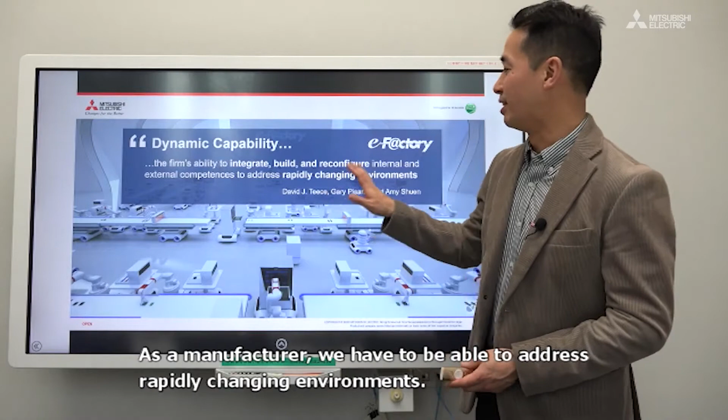In that context, this word dynamic capability is becoming very popular. What is dynamic capability? Dynamic capability is the firm's ability to integrate, build, and reconfigure internal and external competences to address rapidly changing environments. And that's what we're facing right now. As a manufacturer, we have to be able to address rapidly changing environments. And that's why a lot of people are looking at flexible manufacturing to adjust to these situations.

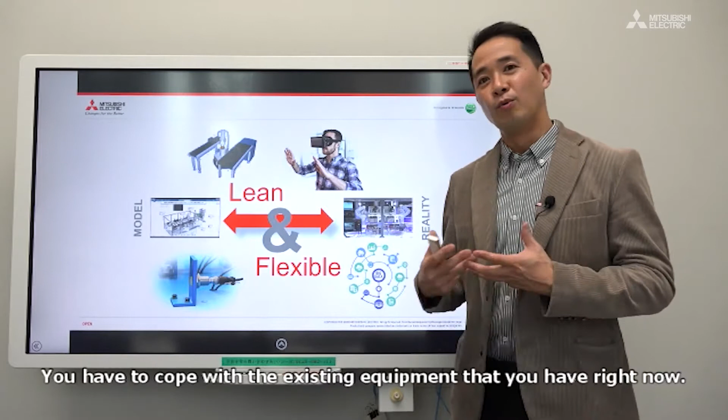At the end, what we always tell our factory staff is the most important thing is to be lean and flexible. You don't have time to really ramp up production with new factory lines. You have to cope with the existing facilities you have right now. And in order to do that, your factory, at its core, has to be lean and flexible. And I think this is very important.

So let's talk a little more about manufacturing in the new normal. And maybe I can share some experiences that we had in our own factories to cope with the COVID-19 virus.

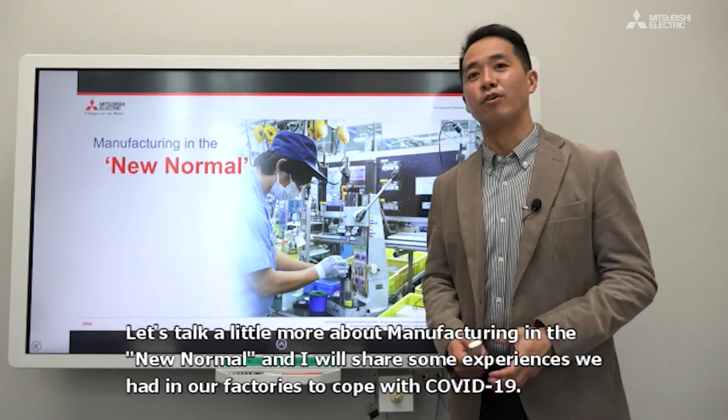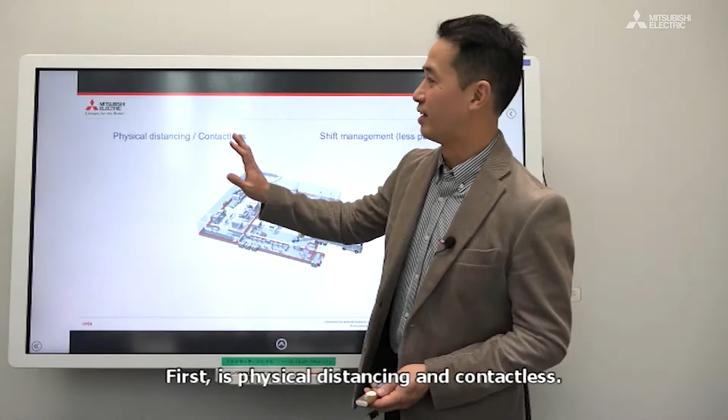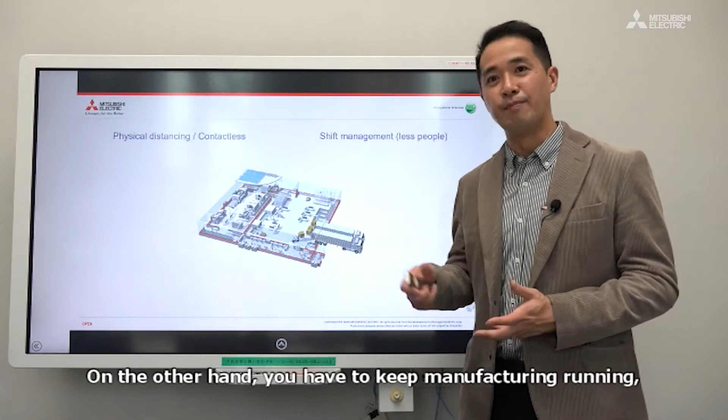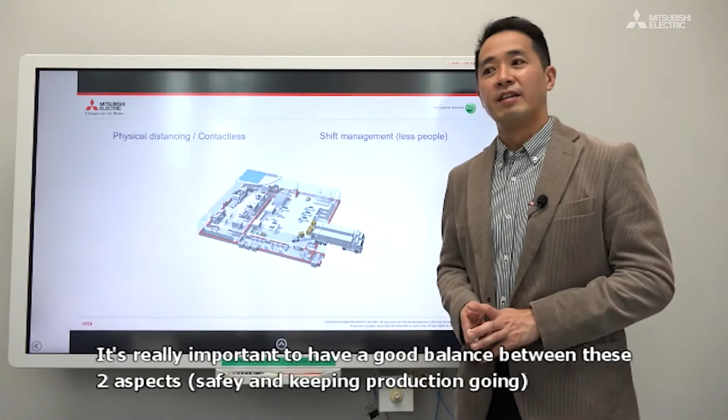I think there are two major things you have to be aware of in the new normal. First is physical distancing and contactless, and the second is shift management. Today, I'd like to mainly speak about shift management. The biggest risk you have in the factory is someone gets infected by the virus and you have to isolate everybody or other people. You have to assure the physical safety of your people in the factory, so it usually results in a shutdown. But on the other hand, you have to keep manufacturing running. You have your duty as a supplier to the market to provide parts. And it's really important to have a good balance between these two aspects.

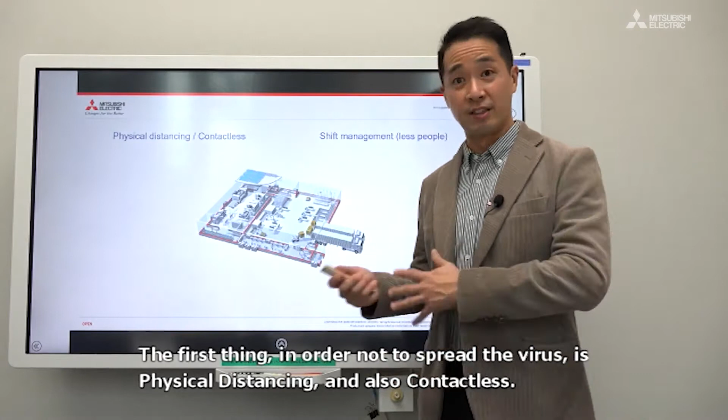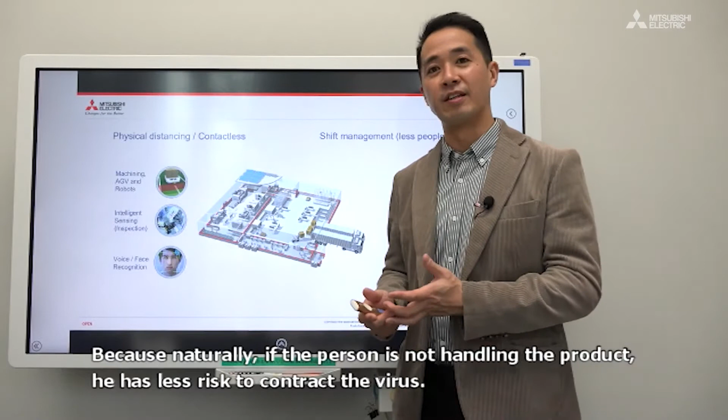So the first thing, in order not to spread the virus, is physical distancing and also being contactless. We're talking about things like machining, automation, using AGVs and robots, because naturally, if the person is not handling the product, he has less risk of being infected.

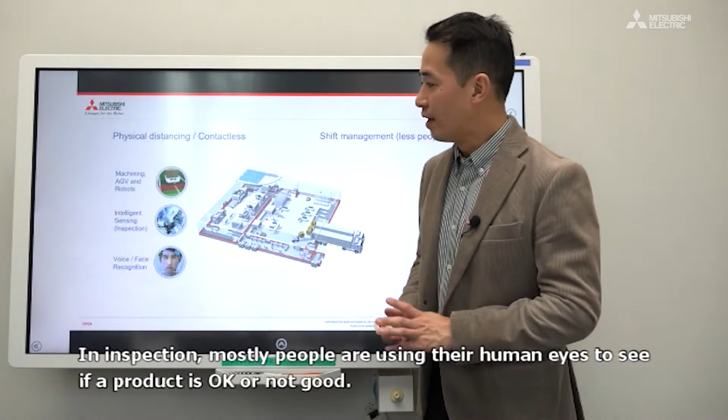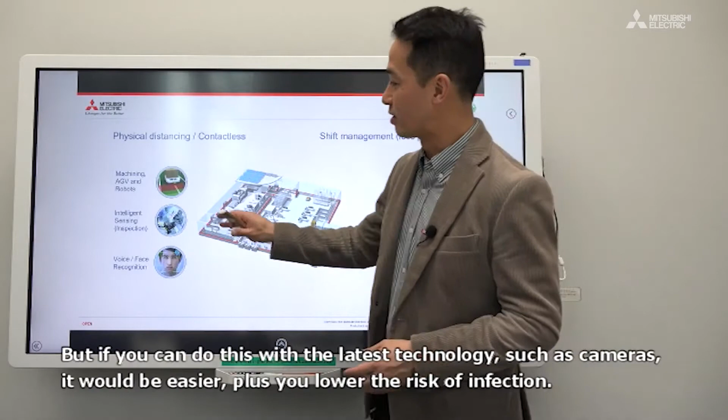On the other hand, there's other things like intelligent sensing that a lot of people are looking at. Right now, a lot of people, with their human eyes, are looking to see if products are good or not. But if you can do this with the cool technology out there with cameras, it would be a big plus. Plus, you lower the risk of infection.

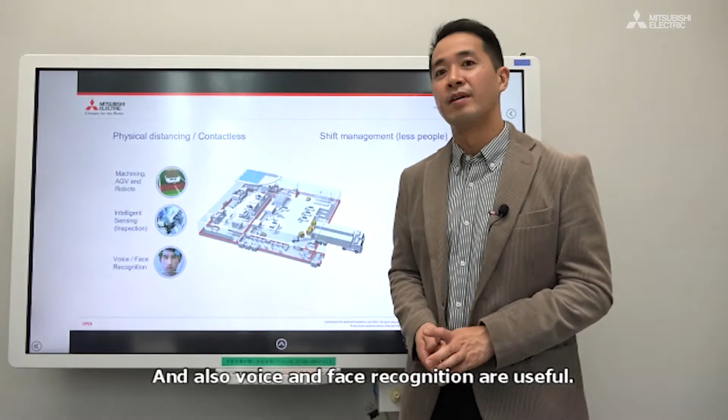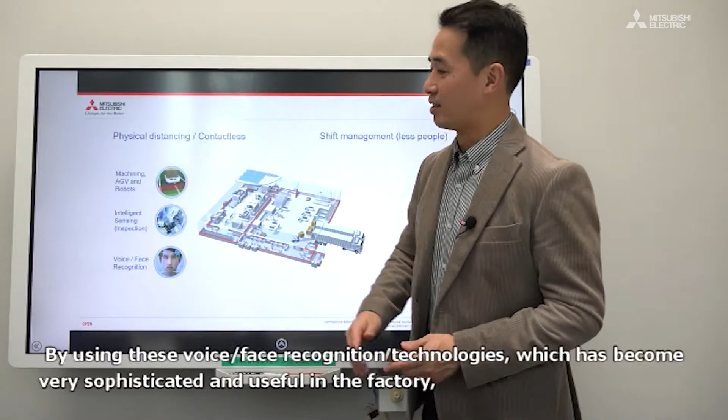Other things are voice and face recognition. There's a lot of buttons on the factory floor. When you move a machine, when you want to press an e-stop, you need to press a button. But that's also a risk for infection. By using these voice and face recognition technologies, which have become really sophisticated and usable in the factory, I think these are going to help you maintain your physical distance.

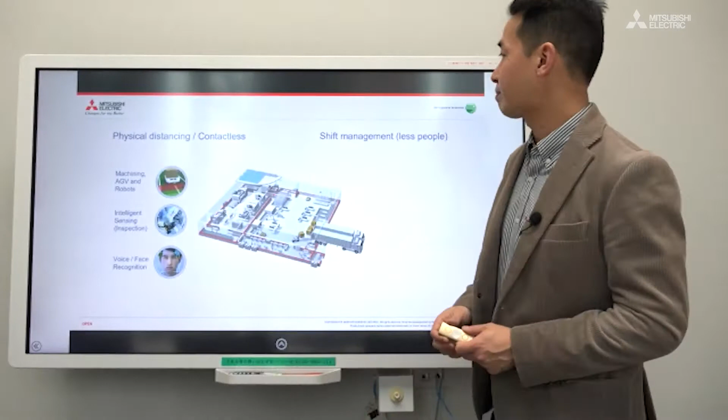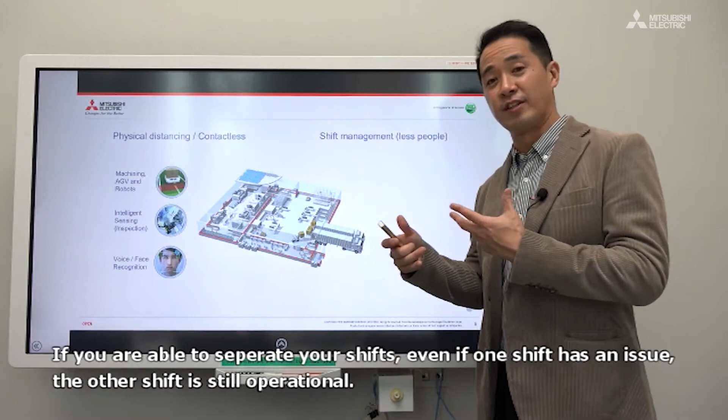The other part is shift management. I'm going to talk about this in the next slide, but basically, if you are able to separate your shifts, then even if one shift has an issue, the other shift is still operational, meaning that you will be able to continue production.

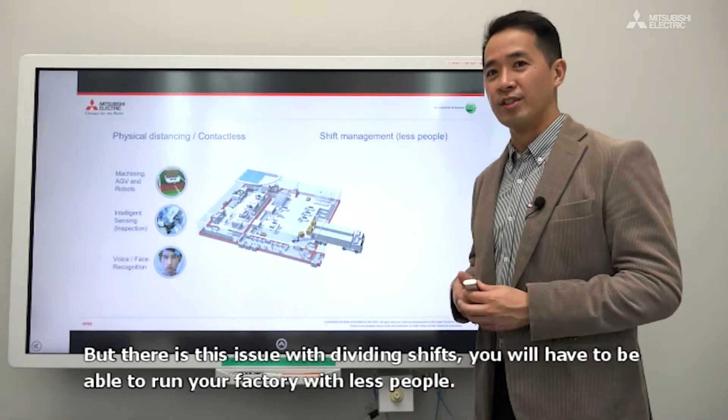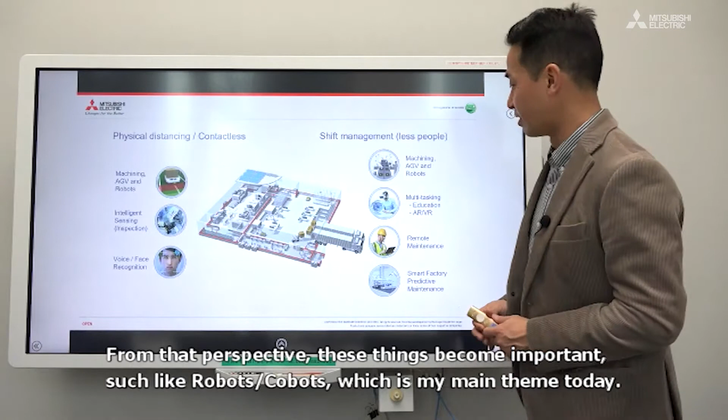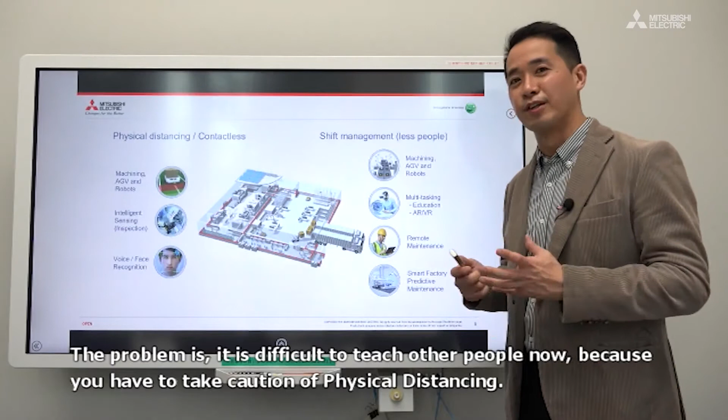But there is this issue with shift management, meaning you have to be able to run your factory with less people. In that perspective, using robots, which is my main theme today, and other factors become very important, such as multitasking in education. Because you're running the factory with less people, you need to educate people to do other tasks.

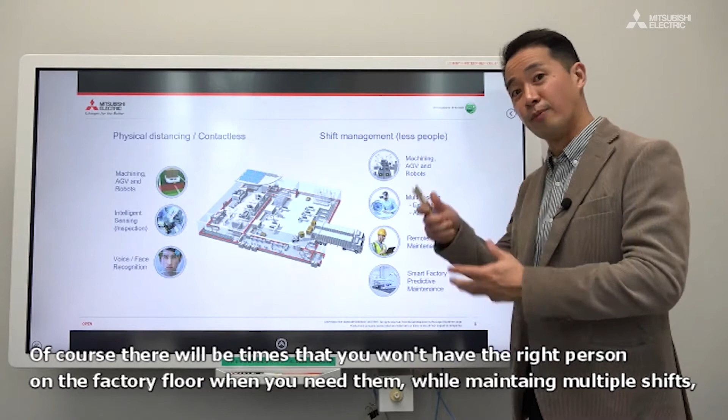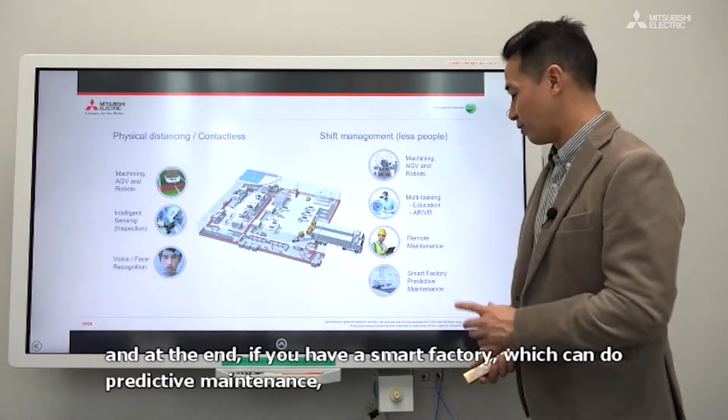The problem is it's really difficult to teach people because you have to be aware of physical distancing. That's why technologies like AR and VR or online learning will be very important. Of course, there will be times you won't have the right person on the factory floor when you need them if you're maintaining shifts. In those cases, remote maintenance capabilities are also becoming very important. And at the end, if you have a smart factory which can do predictive maintenance and tell you problems before they happen, that's the best. That's something we definitely should aim for in the future.

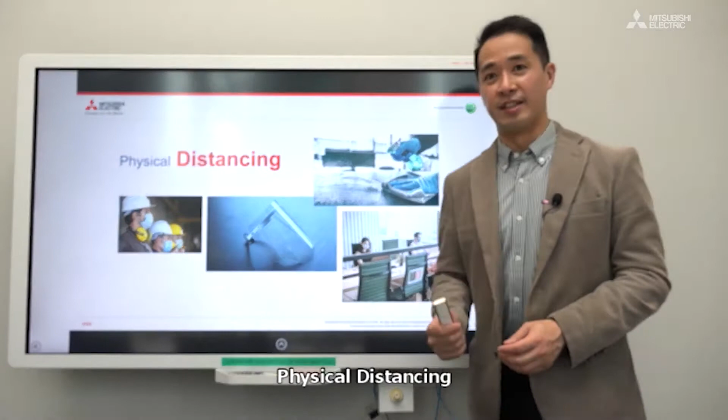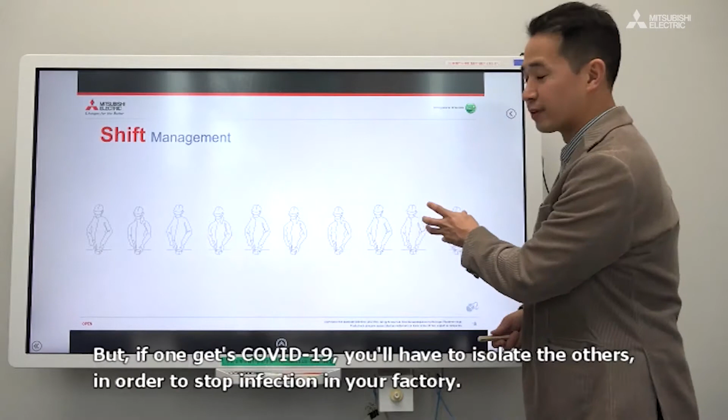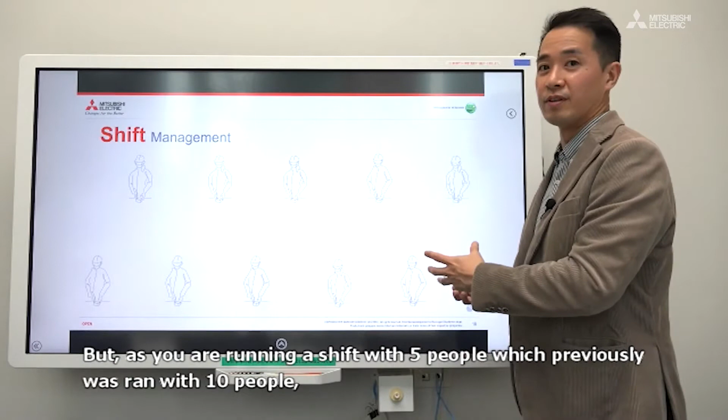Physical distancing. As I said, this actually happened in our factory floor: you have a factory running with 10 people, but if one person gets the virus, you have to isolate the others to not spread the virus in your factory. So what you do is create 2 shifts. But because you're running a shift that previously had 10 people with only 5, that means you have to do something in between—they can't handle the work of 2 people. And that's why robots are becoming very closely looked at in the new normal.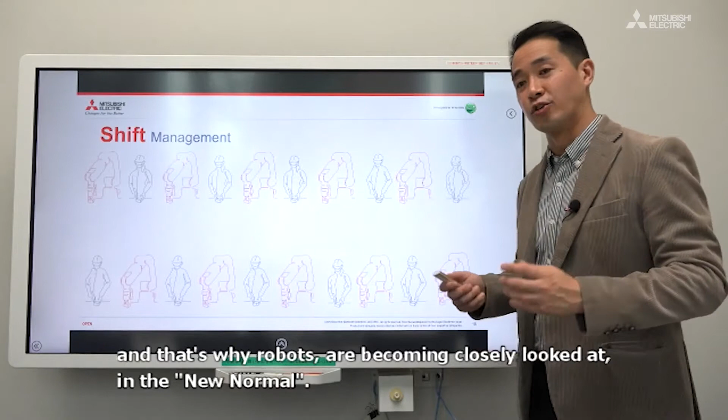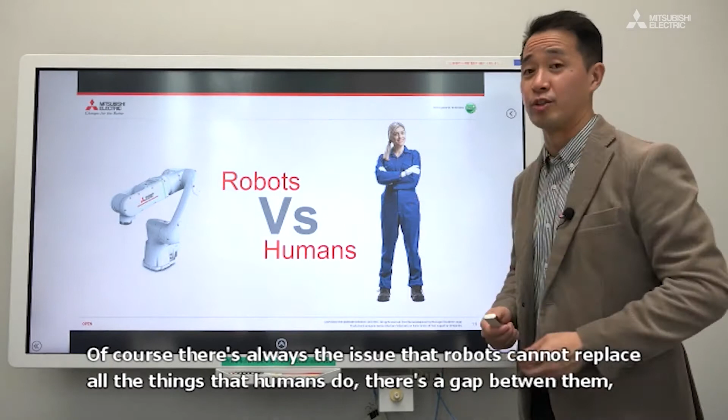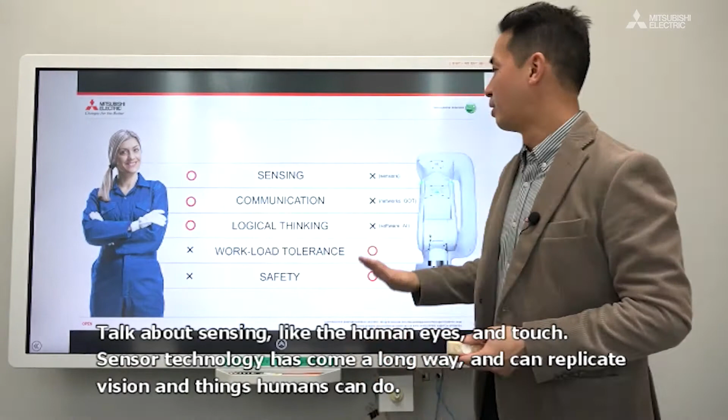Of course, there's always the issue that robots cannot replace all the things humans do, so there's always a gap between them. But with new technologies, we see this gap becoming much smaller. I mean, you talk about sensing, like eyes and touch, but sensor technology has come a far way, and it can replicate a lot of movements and vision that a human has.

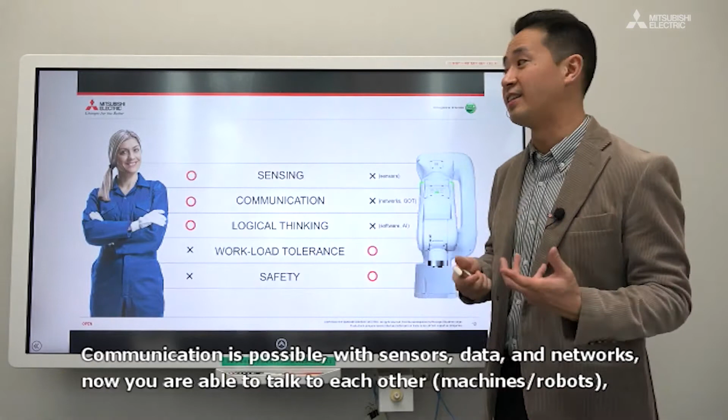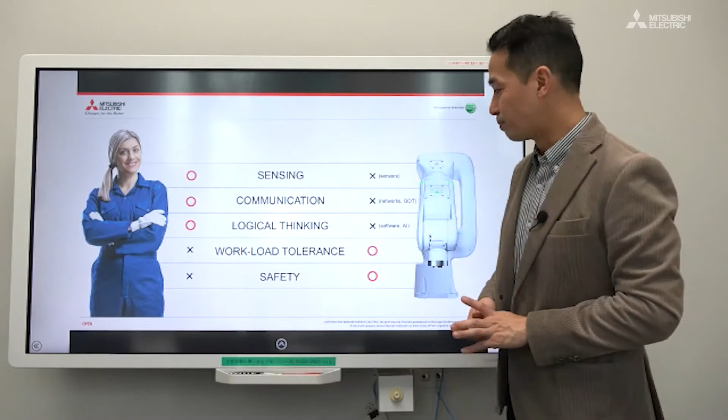Communication with sensors and networks and data—you're able to communicate with each other better in the future. And logical thinking, I'm sure with developments in software and AI, it's going to do a very good job. There's also some benefits a robot has that a human doesn't, such as workload tolerance. They can do the same repetitive movement over and over for 24 hours without getting tired.

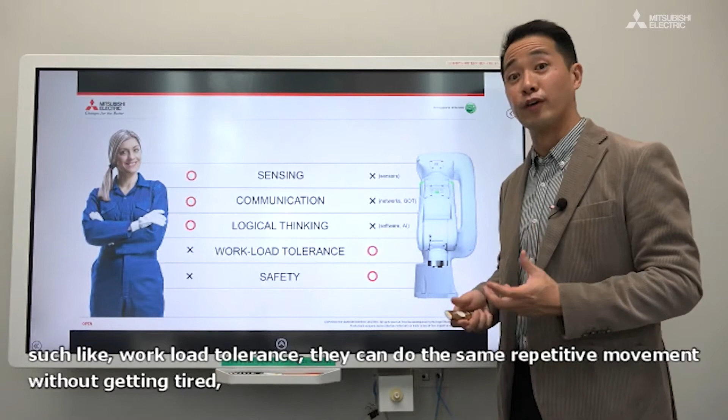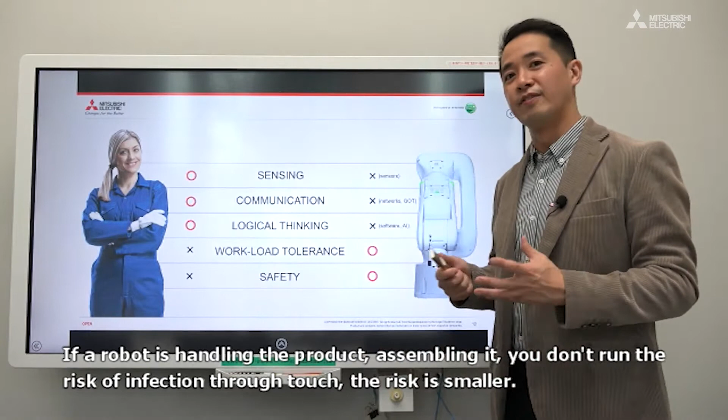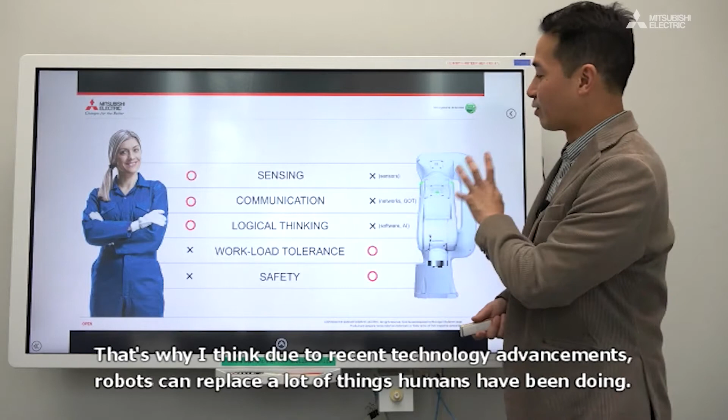And the other thing, which is most important in the new normal, is it's safe. If a robot is handling the product, assembling it, then the risk of being infected with the virus through touch is very, very small. So that's why I think, due to recent technology advancements, a robot can replace a lot of things that humans can do.

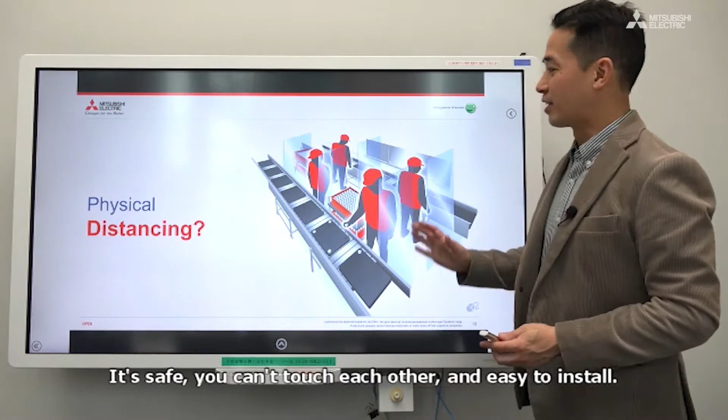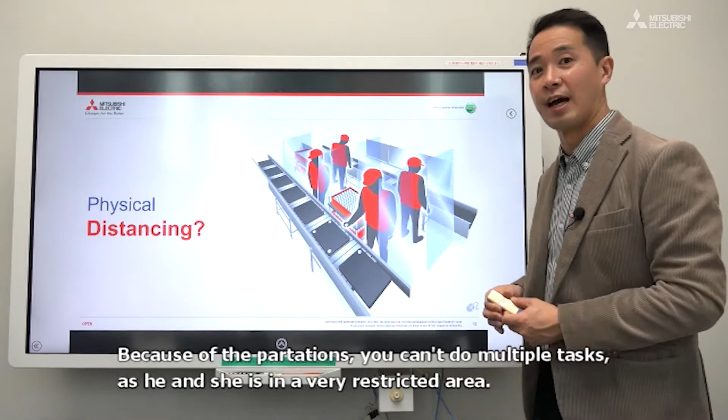Okay, let's talk about physical distancing in the factory. The first step everybody thinks of, and the easiest, is to put partition screens in between. Okay, it's safe, you can't touch each other, easy to install, but there's a big issue with this, as it restricts the movement of the human being. Because of this, he can't do multiple tasks at one time, and he's in a very small area to work with. So it's not really good from a productivity point of view.

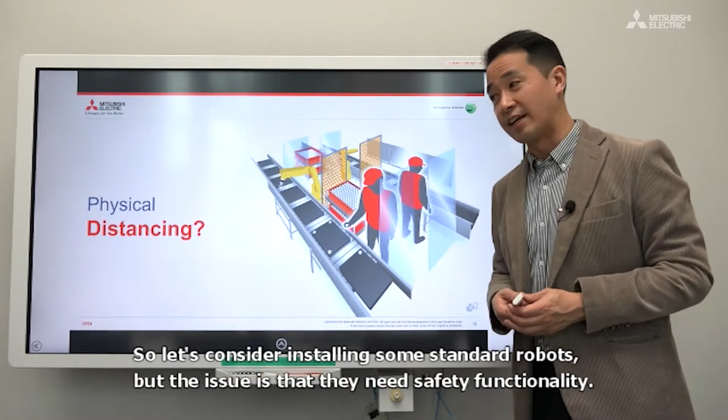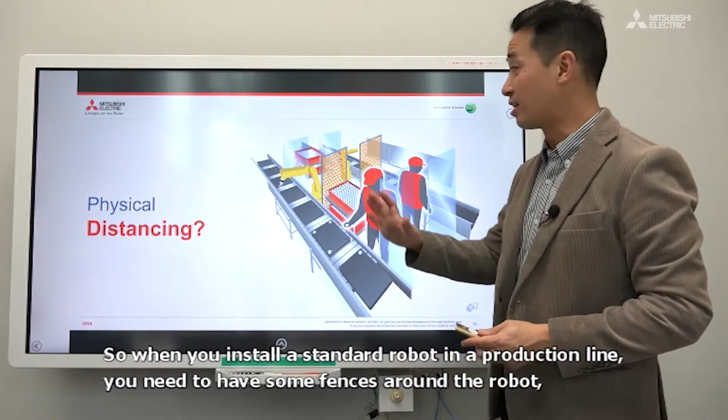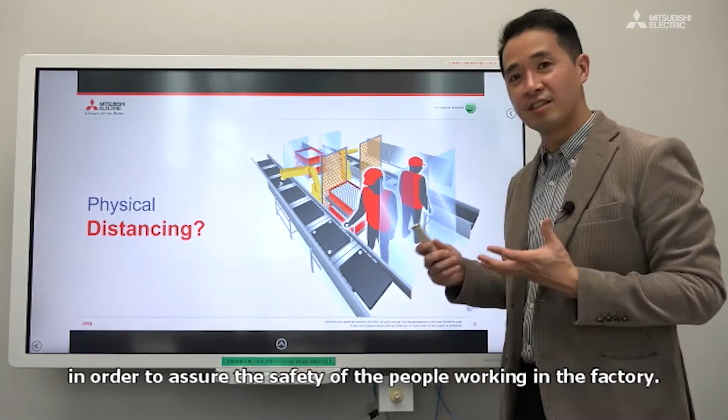Okay, then let's install some standard robots. But the issue with standard robots is they need safety functionality. So usually if you try to install a standard robot in a production line, you still need gates or fences around the robot to ensure safety for the people working in the factory. So this still restricts the movement and multitasking that this person needs to do in the factory.

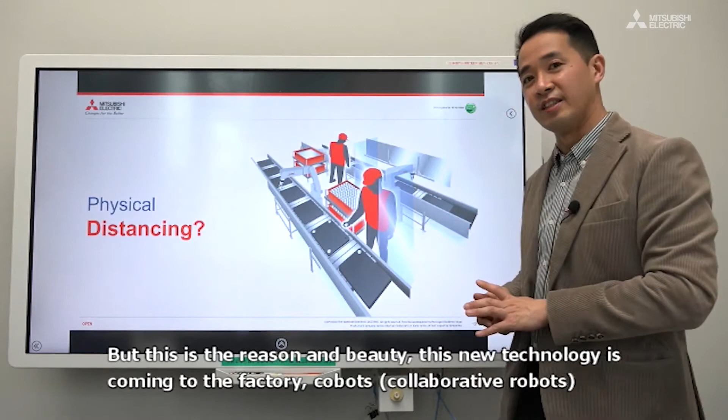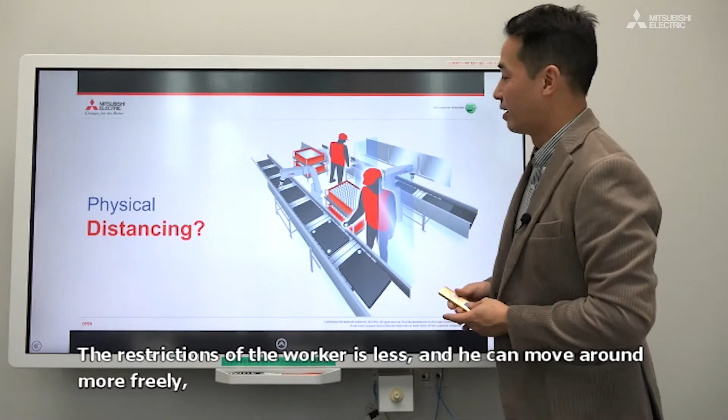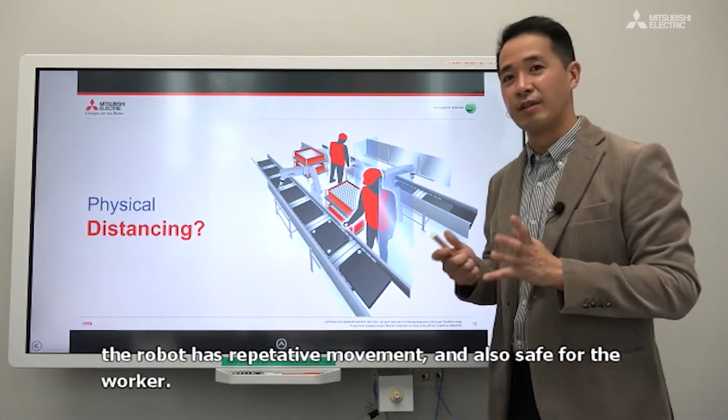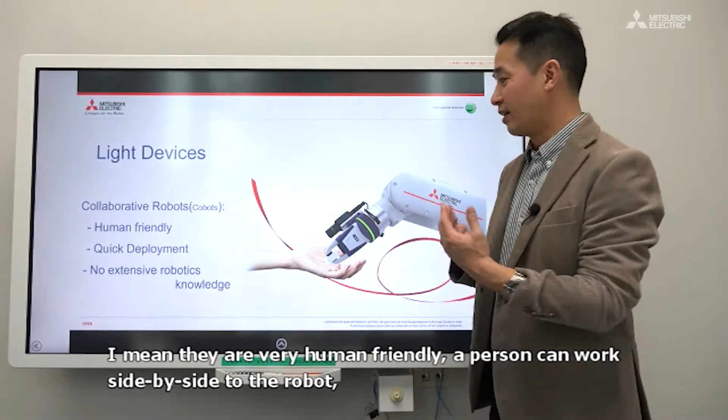One characteristic of a cobot that's really great is they are what you call light devices. What do I mean by light devices? I mean they're not only human-friendly, a human being can work side by side next to them, but it's also very quick and easy to deploy.

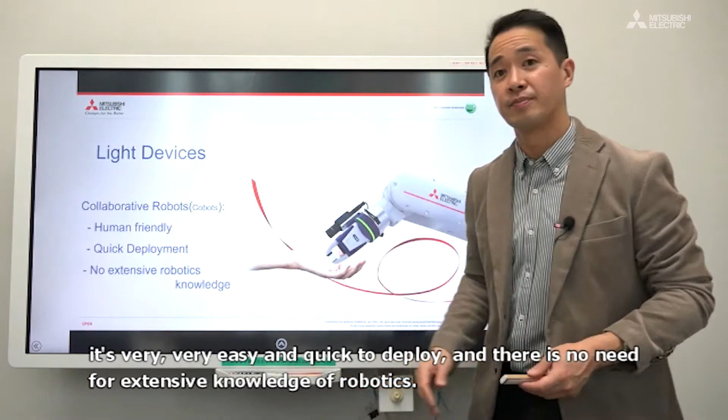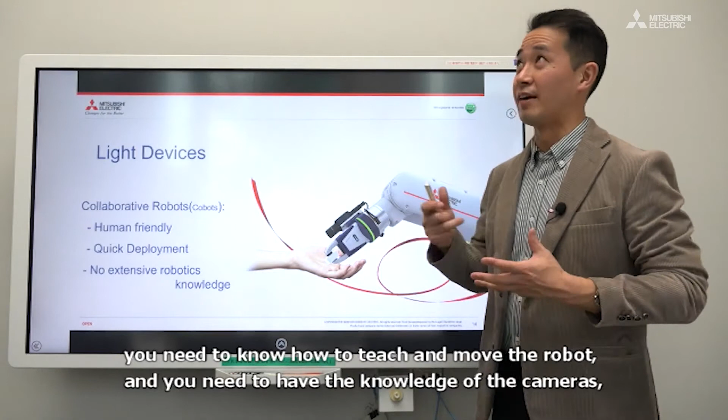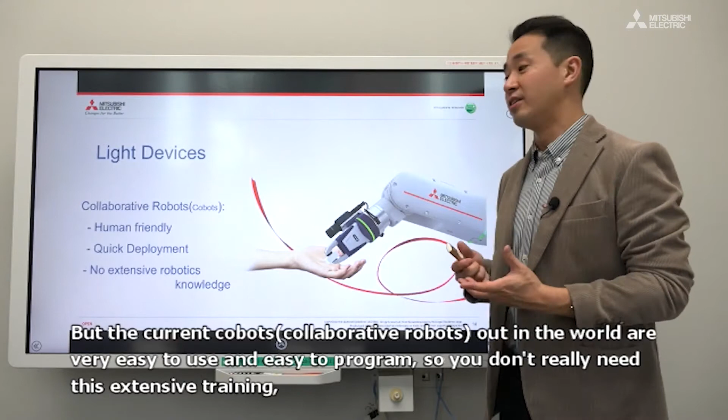Everybody thinks, hey, just install a robot. But in reality, it's not so easy. You need to know how to teach the robot, and you need to have knowledge of the camera. So a certain amount of robot technology is necessary. But these cobots that are out in the world are very easy to use and easy to program, so you don't really need this extensive training.

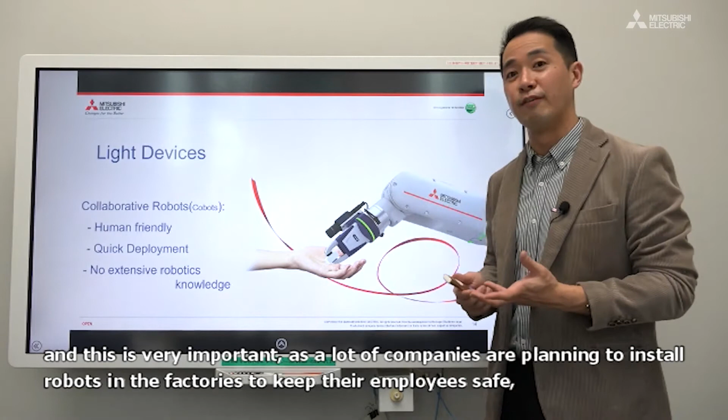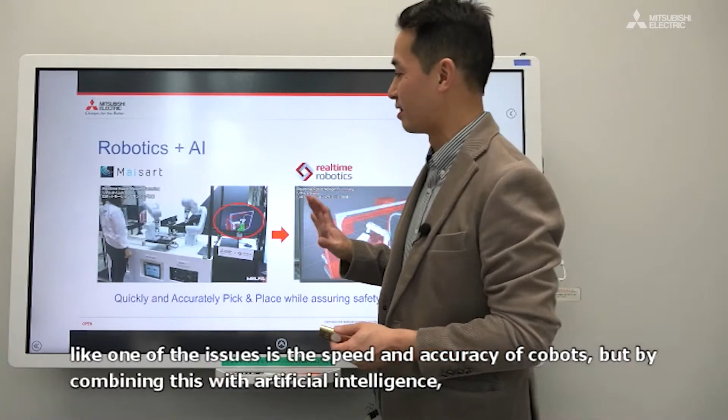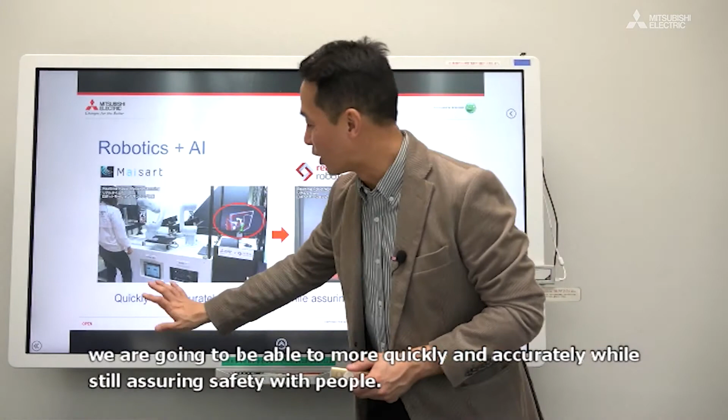This is very important because a lot of companies are planning to install these robots to keep their employees safe, but of course you don't have a lot of time. I'm sure the technology surrounding cobots will only develop even better. One of the issues is the speed and accuracy of the cobots, but by combining this with artificial intelligence - and that's exactly what we're trying to do now - we're going to be able to more quickly and more accurately pick and place while still assuring safety with human beings.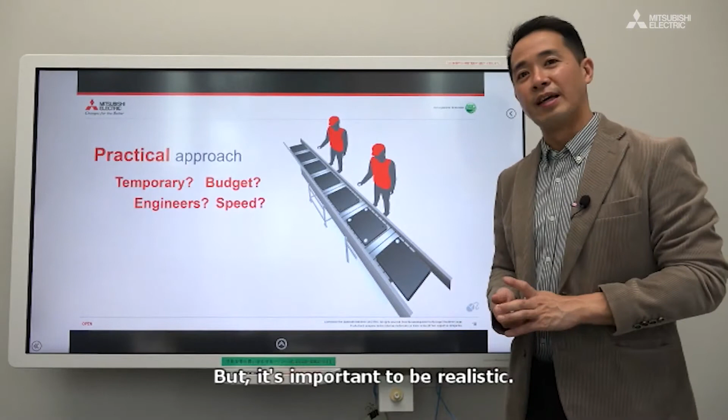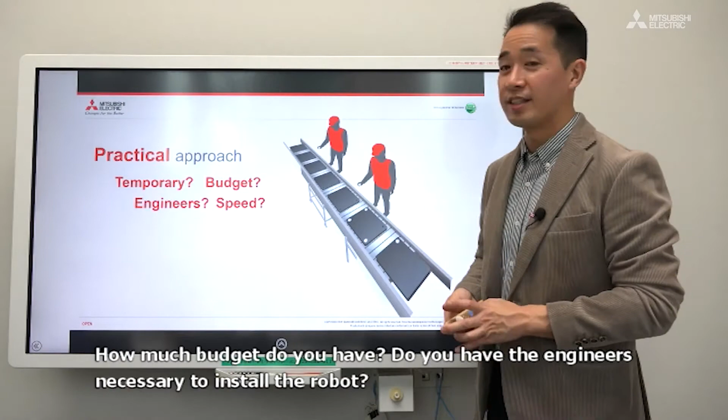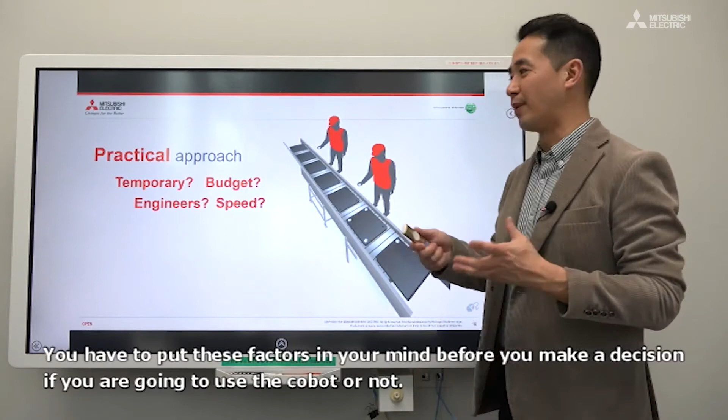But I also want everybody to be realistic. Please always take a practical approach. Is the solution you need temporary? Are you only going to do this for 1 month? Or maybe it's going to be permanent for 3 years after this? How much is your budget? Do you have the engineers to engineer the robot or the cobot? And how quick do you need this installation? You have to put these factors in your mind before you decide if you're going to use a cobot or not, because sometimes the answer is a quick partition screen.

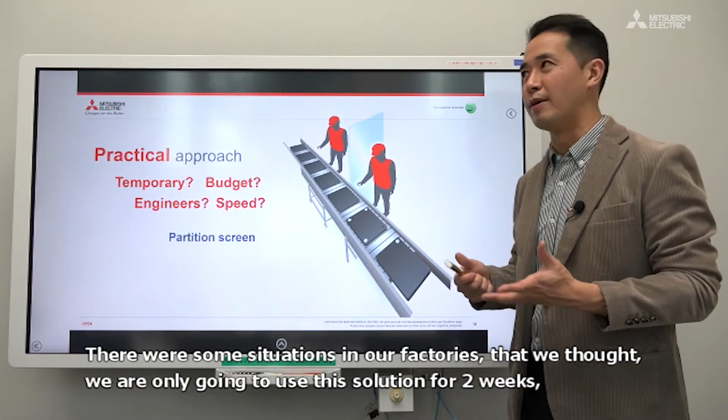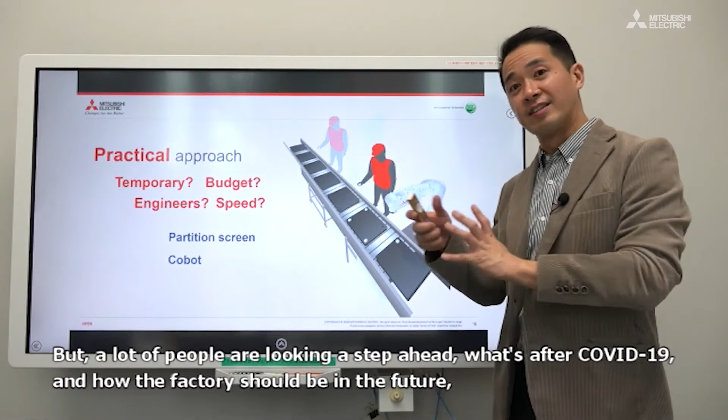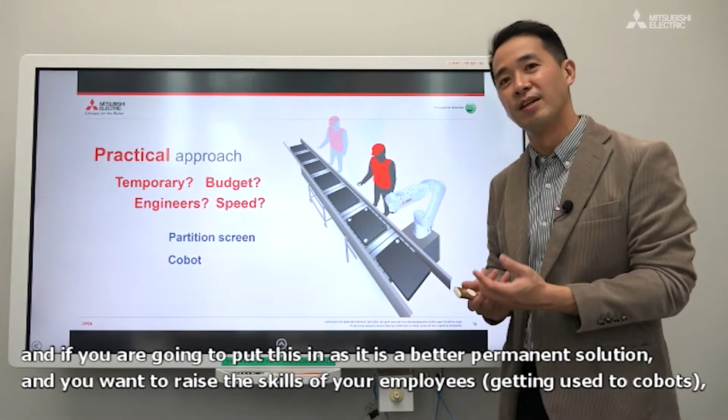There's a lot of issues in our factories that we figured out - okay, we're only going to use this for maybe 2 weeks, so let's just cope with the partition screen, and think about cobots and robots for the future. But a lot of people are looking a step ahead, what's after COVID, and how the factory will develop. If you're going to put this as a permanent solution, or you want to raise the engineering skill of your factory employees, maybe installing a cobot right ahead is your right choice. But I think it's important to be very practical because at the end, it's safety and it's also ROI, return on investment.

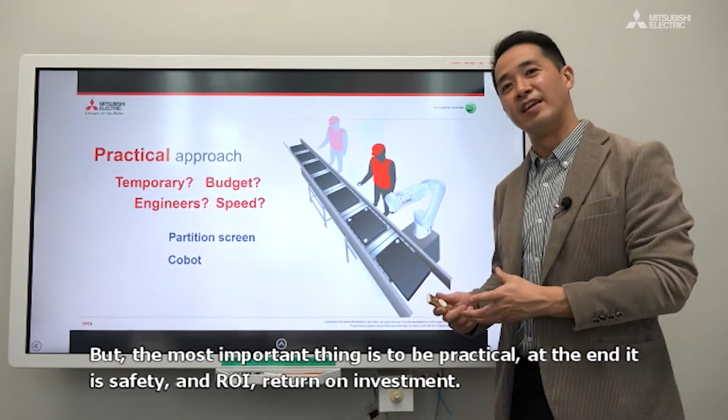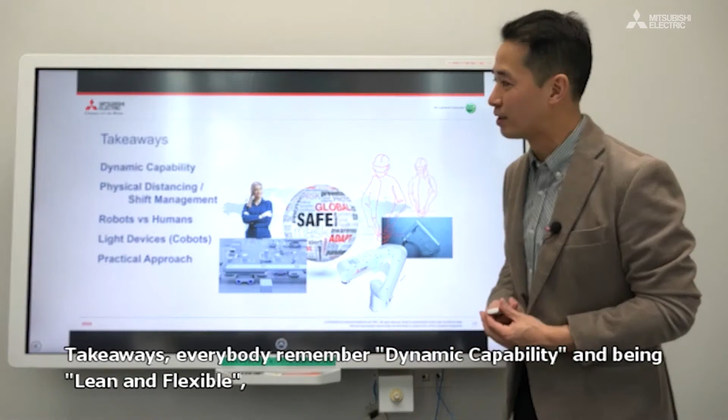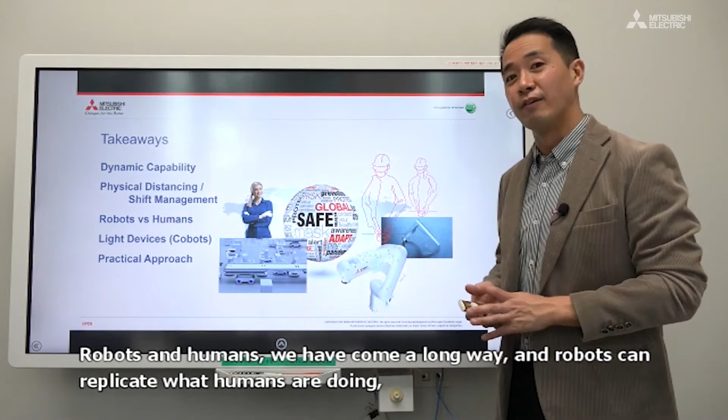Okay, takeaways. I think everybody please remember dynamic capability and keeping lean and flexible. These are the keywords: physical distancing, shift management, and of course employee safety is priority. Robots and humans - we've come a far way of being able to replicate what humans are doing. Please consider cobots because they're very light devices and easy installs to the factory. And at the end, let's be practical.

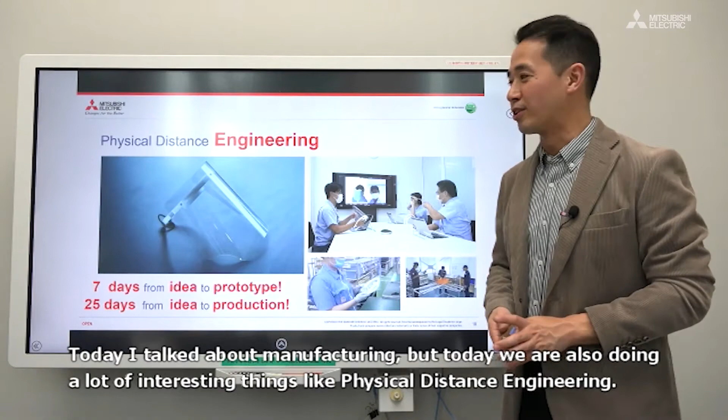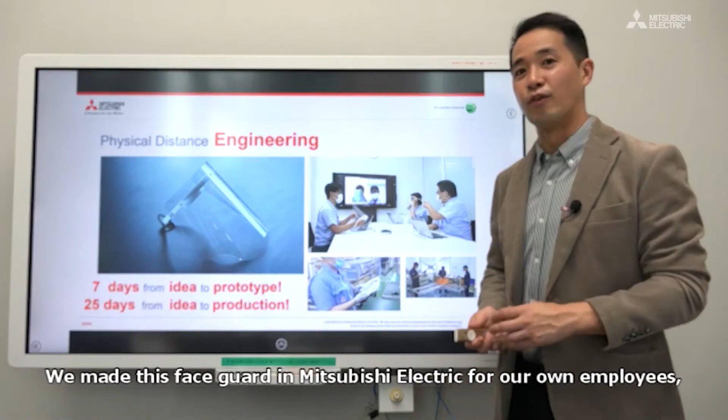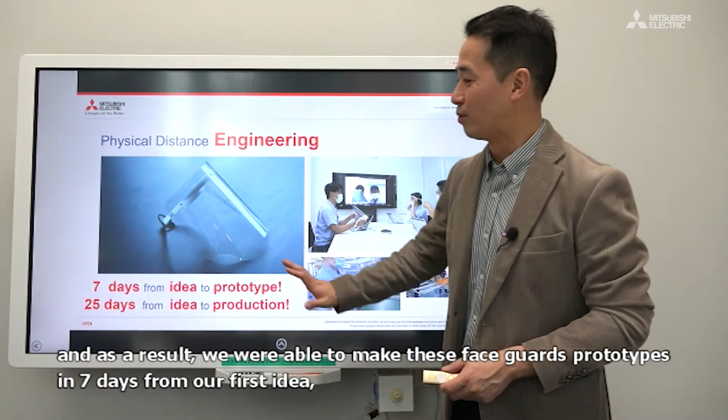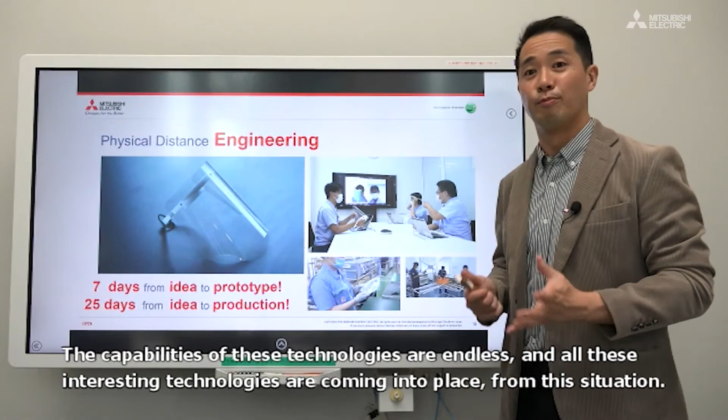Okay, today I talked about manufacturing, but of course we're doing a lot of interesting things in physical distancing engineering as well. We made this face guard in Mitsubishi Electric for our employees. We wanted to make them by ourselves for usage in our factories because these are needed by the medical staff that are fighting every day for us in the world. In order to do this, we used all these remote engineering capabilities, and actually we were able to make the first prototype within 7 days from idea, and also put it into the mass production line in 25 days. So I think the capability is endless, and all these kinds of interesting technologies are coming into place from this situation. So maybe sometime I'll be able to discuss this in detail also.